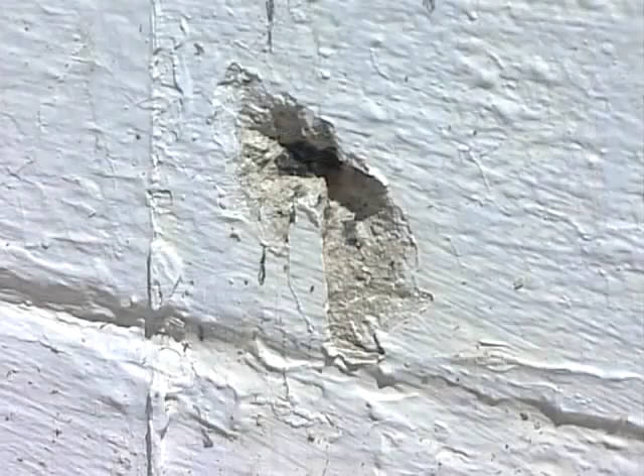It's time again to paint the outside of your home, but didn't you just paint it a few years ago? Yes, and you'll be painting it again in another few years, and another few years. Mother Nature takes a toll on the appearance of your home's exterior. Rain, snow, sun, and pollution are just a few of the elements that cause even the best quality paints to chip, flake, and peel.

Since more homeowners today are staying in their homes longer, they're finding they're painting their home's exterior an average of 10 separate times, at a cost of up to $8,000 to paint your home every 3 to 5 years. Add in inflation, and a homeowner could end up paying up to $80,000 to paint their home over a 30-year time frame. $80,000? That's outrageous.

Now there's a better way to maintain the beauty of your home's exterior. And it's not vinyl siding or fiber cement siding. It's not even a paint. It's a revolutionary coating system that's so advanced it protects your home for a lifetime.

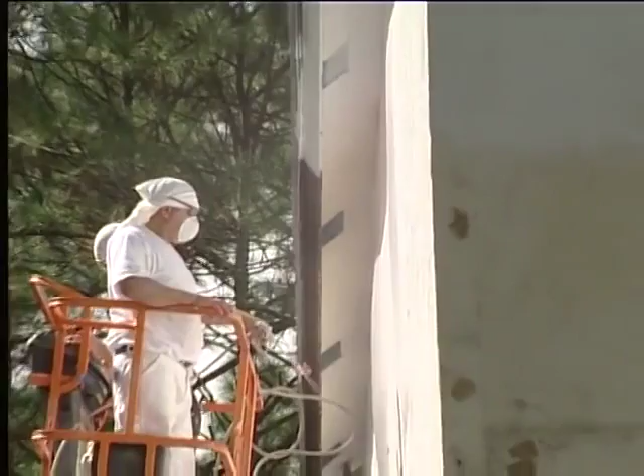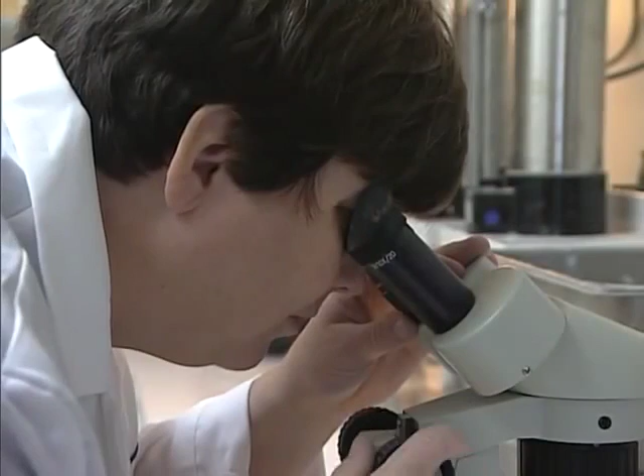It's Tex-Cote Supercoat. Tex-Cote was scientifically formulated and tested to give your home the ultimate in beauty and weather-resistant protection. Many times thicker than ordinary house paint, Tex-Cote can withstand an average of 40 years of exterior exposure, no matter how harsh the conditions. Even moisture can't penetrate it.

From stucco to wood to masonry homes, Tex-Cote Supercoat can be applied to a variety of surfaces and in a variety of textures. Whatever your home's exterior surface, our professional applicators will carefully and thoroughly apply Tex-Cote using our exclusive 10-step process. First, we'll inspect your home's exterior. This inspection will reveal any surface deterioration such as peeling, flaking, and suspect areas.

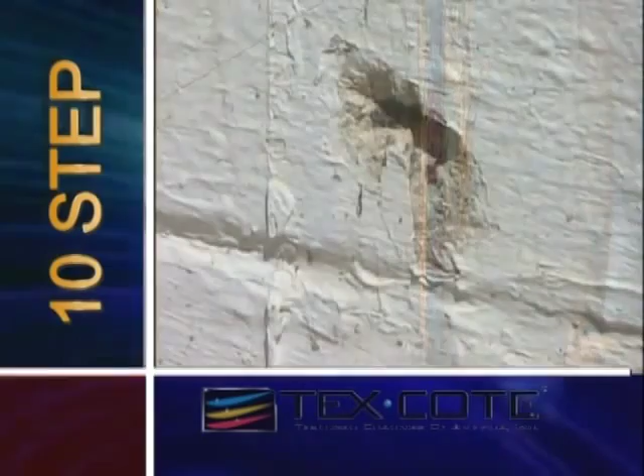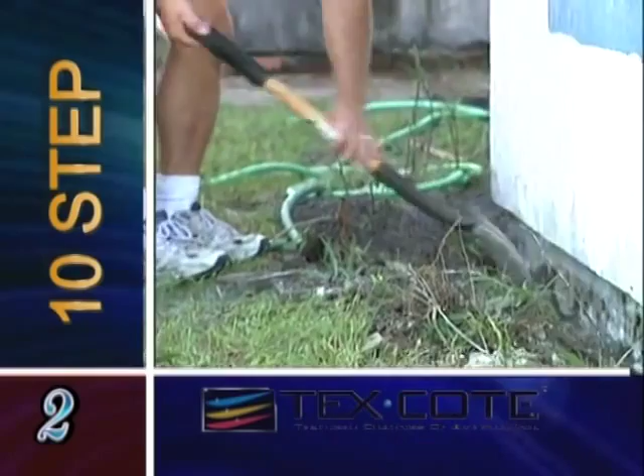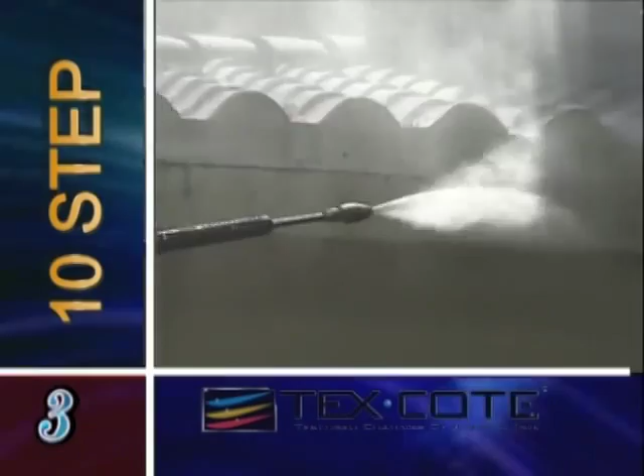Second, we'll trench around the perimeter of your home where possible. This provides full Tex-Cote protection below the grass line, helping to inhibit the capillary action of ground moisture while helping eliminate costly repairs to the foundation of your home. Third, your entire home is cleaned using powerful pressure cleaning action to remove dirt, stains, loose paint, and foreign substrates.

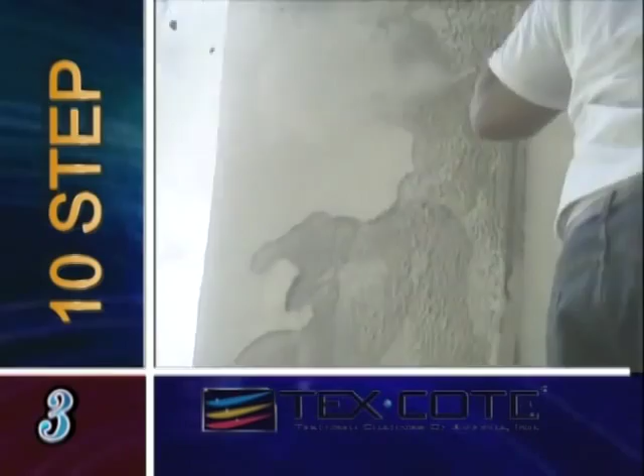It also removes surface mildew and algae. This cleaning not only reveals areas in need of patching, but also creates a clean, tight bonding surface for the Tex-Cote Primer and Tex-Cote Supercoat Top Coat.

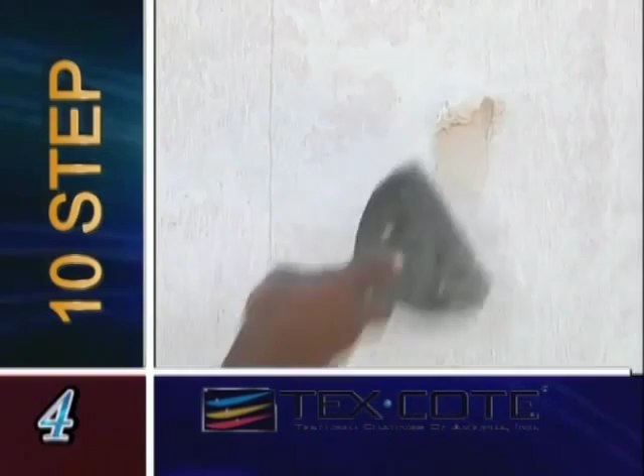Fourth, deteriorated areas are prepared and patched using specially formulated TexBond Flex Patch, or for more difficult areas, a skim patch is used. These products correct surface defects and create a sound and uniform surface for coating.

Fifth, for the most professional-looking job possible, careful masking is done to all areas that are not to be coated, like windows and doors. Bushes and shrubs near your home will also be covered to protect them from overspray.

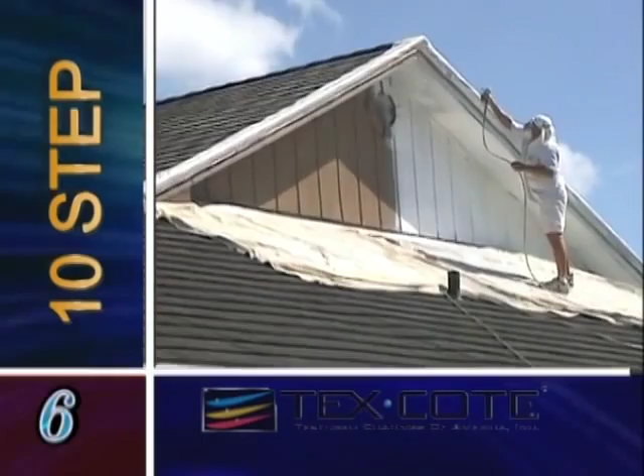Sixth, the Tex-Cote Primer is sprayed on using heavy-duty equipment at pressures up to 3,000 psi. This special spraying process creates a thick, armor-like surface that protects the original exterior wood or masonry surface from weather damage.

Seventh, your entire home is carefully inspected for quality and missed areas. Eighth, depending upon your preference, either Tex-Cote textured or smooth coating is evenly applied to the surface of your home.

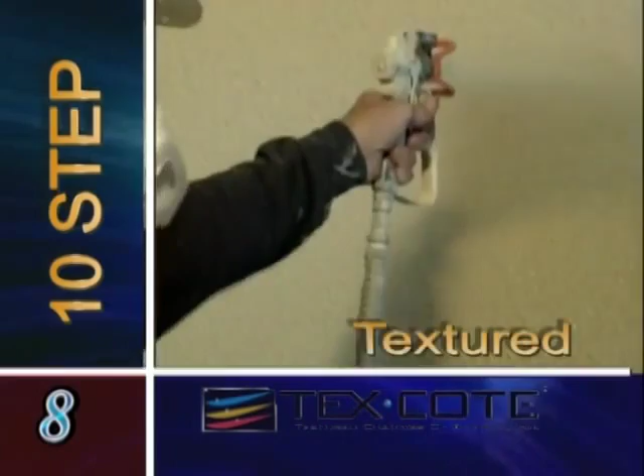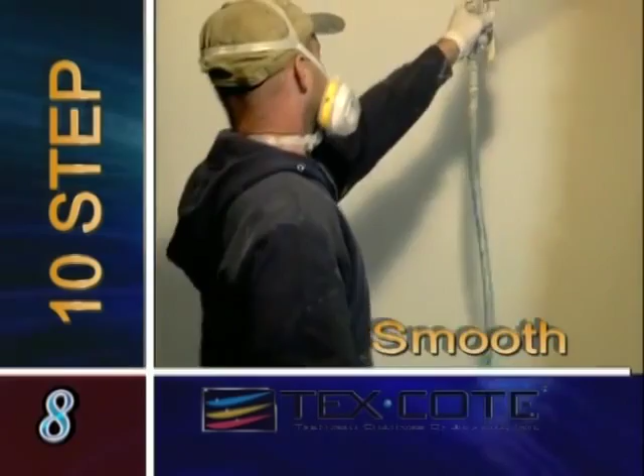This scientifically proven finish adds exquisite beauty to your home while providing a second barrier of protection against the elements. In addition, the finish has been specially formulated to reflect the sun's heat and can lower surface temperatures by up to 40 degrees when compared to traditional paints in many colors.

This revolutionary heat-reflective finish produces a longer service life and the best weathering and durability in the industry. It could also provide energy savings.

Ninth, the masking is removed from all areas, and then trim coat is applied. Trim coat provides the same level of high-performance protection as the rest of the coated home, and is available in both satin and semi-gloss finishes. Like the SuperCote finish, trim coat also contains reflective pigments to reduce fading.

Finally, lawns, shrubs, and other surfaces are cleaned of debris. Your property is left clean and beautiful, just like your home. Your newly coated home is protected against sun, rain, fading, chipping, frost, snow, wind-driven rain, and moisture.

We are so sure about Tex-Cote Supercoat systems that we back it up with one of the toughest warranties in the industry. Nothing else comes close.

For beauty, selection, durability, and cost savings, trust the name that's led the industry in coatings technology since 1961. The name that's been used by architects, builders, and contractors around the world for over 40 years, protecting thousands of homes just like yours. Trust the name that's been used by such companies as Home Depot, Target, CBS Television, Coca-Cola, and protects the famous Hollywood sign, the LA Coliseum, and some of the country's largest FAA towers.

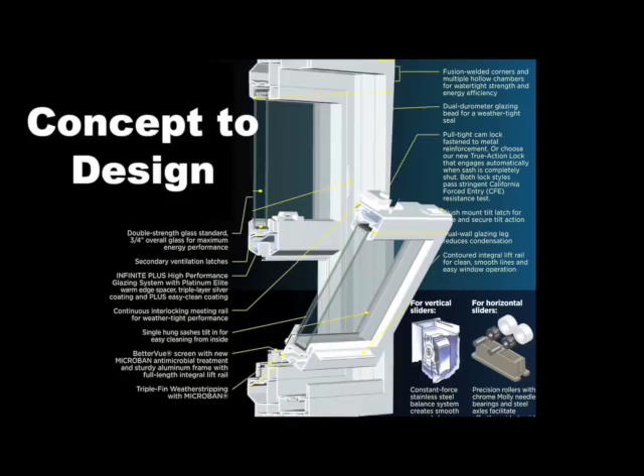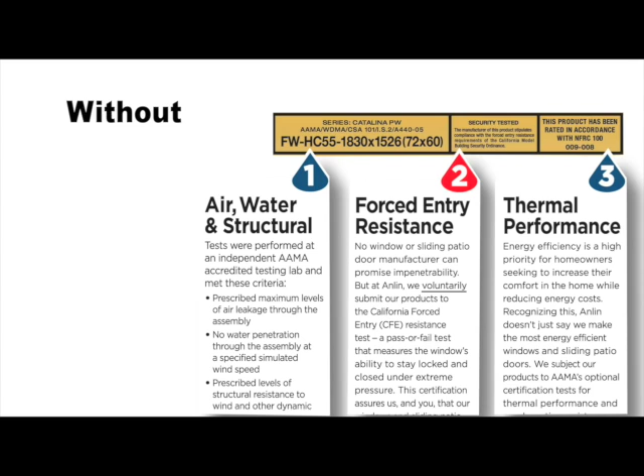Anlin Window Systems is more than a window. It's a window system, from concept to design to the manufacturing process. Founder Tom Vidmar had a vision to create a vinyl replacement window for the California market that was the most beautiful, the highest in energy efficiency, and the safest on the market, all without sacrificing quality for price.

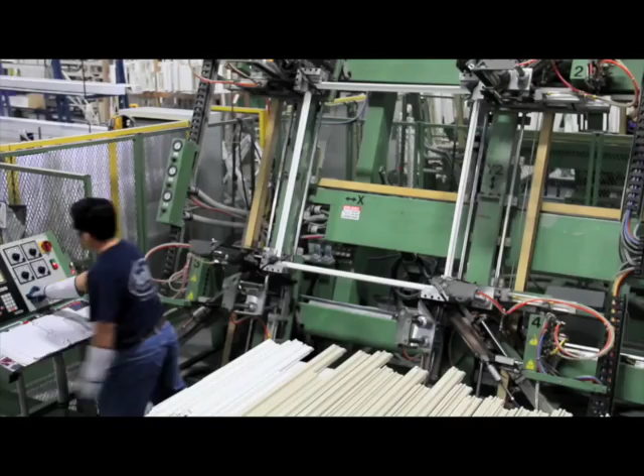Tom and his team achieved this goal by utilizing state-of-the-art robotic equipment to combine 1,542 components and a series of industry-exclusive processes.

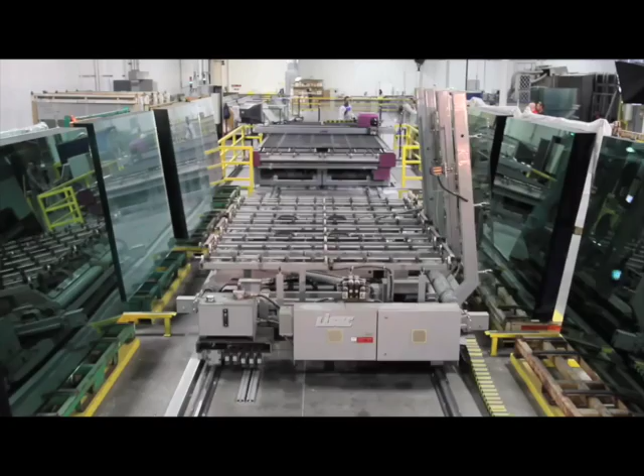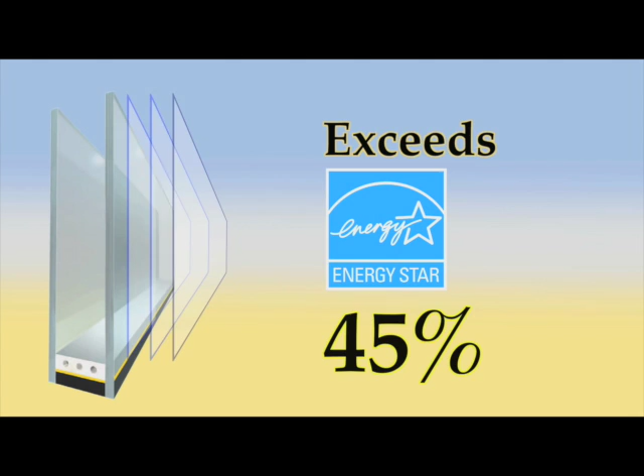To have the best windows, you have to start with the best glass. Anlin leads the industry with their exclusive Infinity Plus high-performance glazing system, providing you with maximum energy savings without compromising on beauty. The science behind the glass is three layers of real silver argentum coating. Anlin's glass exceeds Energy Star requirements by 45%, is 100% more effective than normal glass, all while blocking 95% of harmful UV rays.

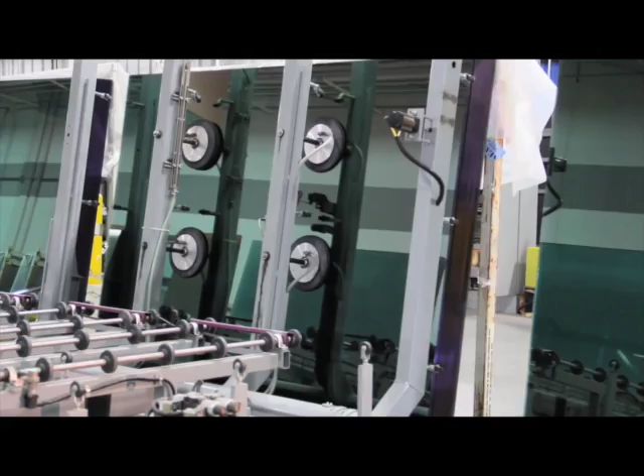While most companies have 12 or more pairs of hands touching their glass, Anlin Window Systems invested in a hands-free automated glass loading, cutting, and edge deletion system, because nobody wants fingerprints inside their glass.

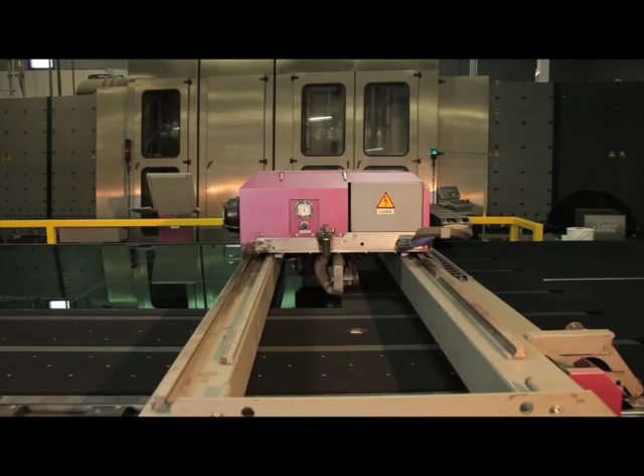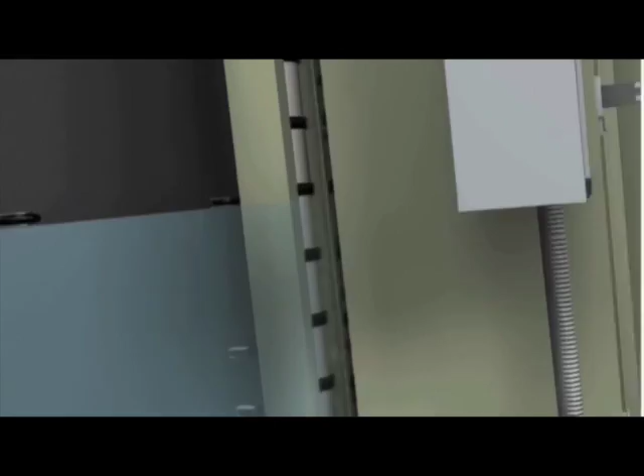The automation doesn't stop there. Each piece of glass runs through an 8-brush vertical glass washer using hospital-quality deionized water and a high-pressure air dryer to make sure the glass is clean before being sealed.

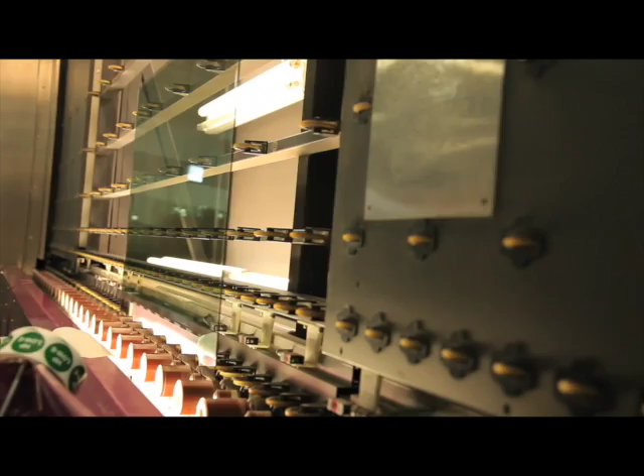The glass unit continues down the line where each piece of glass is light inspected by a pair of human eyes, looking for any scratches, defects, or imperfections, anything they can do to reject that glass before it makes it into their product and out the door.

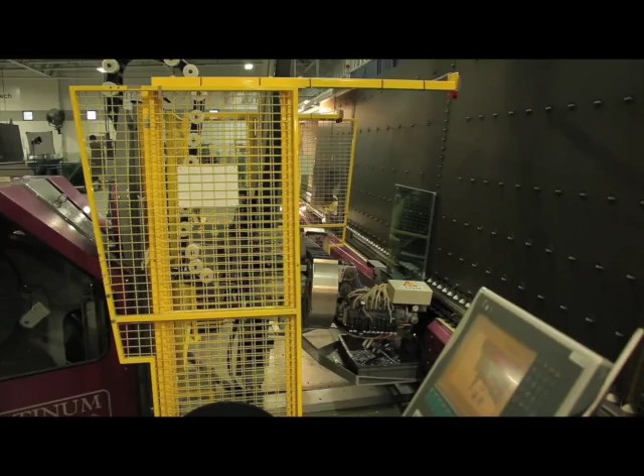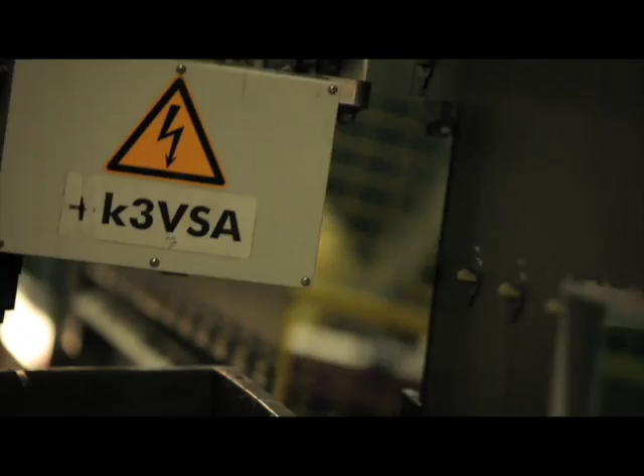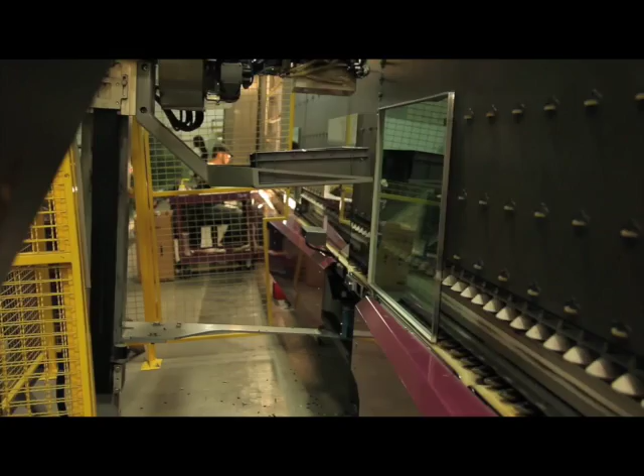Now the window becomes a dual pane, separated by Anlin's exclusive Platinum Elite Spacer. The Spacer Robot follows the edge of the glass, creating a multi-layer vapor barrier and secondary sealant which conducts virtually no heat, drastically reduces condensation and mold between the panes while standing up against heat, cold, and high winds, providing a lifetime of maintenance-free comfort.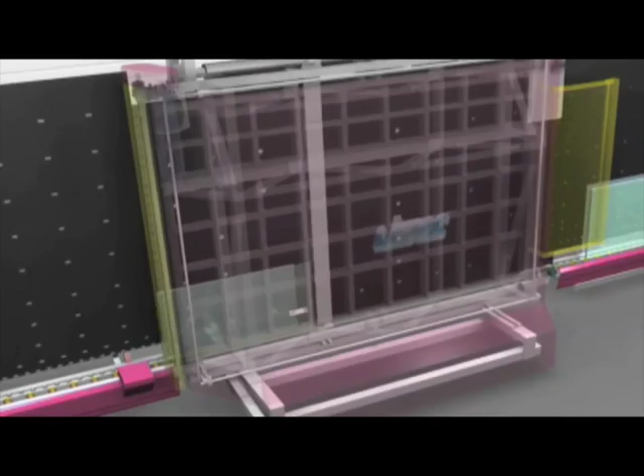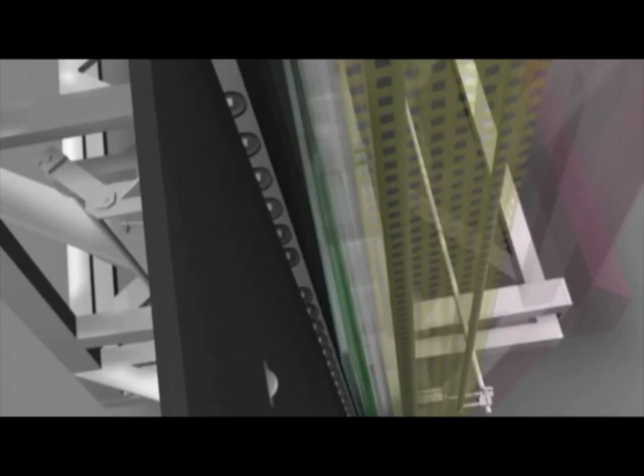Now it's time to fill the window with argon gas, which provides an extremely effective layer of insulation from heat, cold, and noise. Unlike other manufacturers who do this by hand, subjecting them to human error, Anlin uses hands-free, state-of-the-art machinery. Two airtight doors seal the chamber, and the entire atmosphere is flood-filled with argon gas while the two pieces of glass are pressed together, sealing the gas in.

That's how Anlin achieves a 90 to 95% guaranteed fill rate of argon gas. They are the only vinyl window manufacturer in the state of California that has this technology.

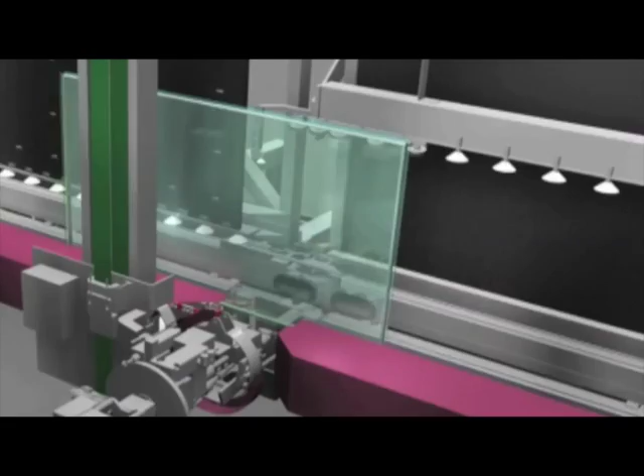The dual pane window is now ready to receive the primary seal of pure butyl rubber. This double seals the window and keeps moisture from entering in. Anytime Anlin can take a manufacturing process in-house to control quality, lead times, and get a better product to customers, they do it.

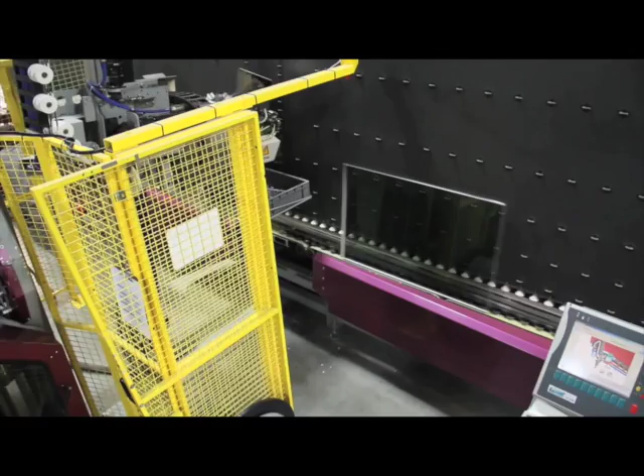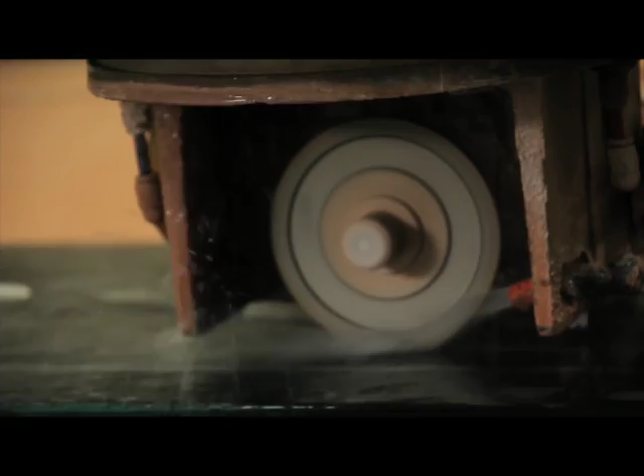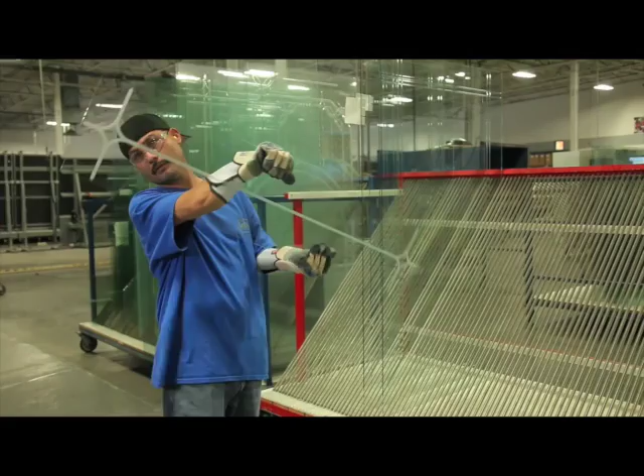The V-Groove machine is a great example. It uses diamond grinding wheels to cut and polish decorative patterns into the inside panel of the glass surface, creating your custom design. It won't collect lint or dust because the etching is between the panels. If you can dream it, they can make it happen.

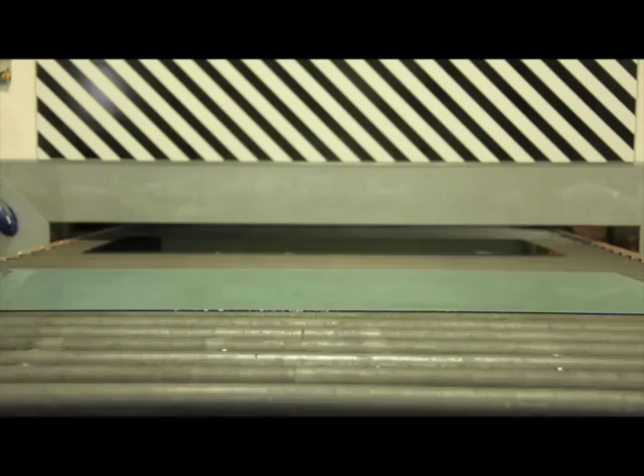If you're looking for tempered safety glass, Anlin is the only major California window manufacturer with in-house tempering to create their own safety glass. This drastically improves quality and lead times.

Now that the insulated glass unit is complete, it's ready for the vinyl frame. Anlin Window Systems only uses Micron Blend Vinyl, a unique lead-free proprietary formula for all their window and door frames. It's optimized for best weathering, durability, color retention, and impact resistance. There's simply no better vinyl for windows and doors than Micron.

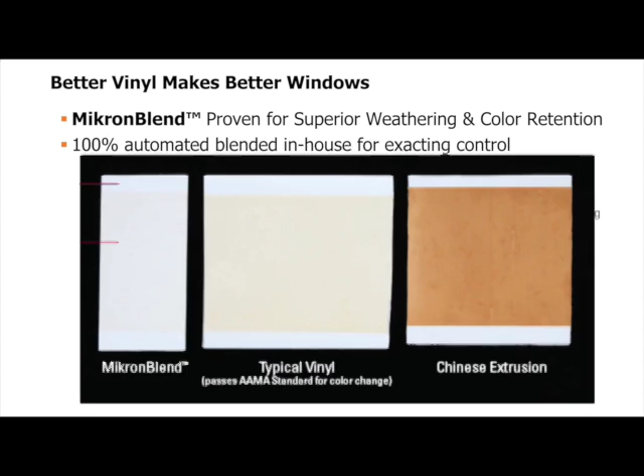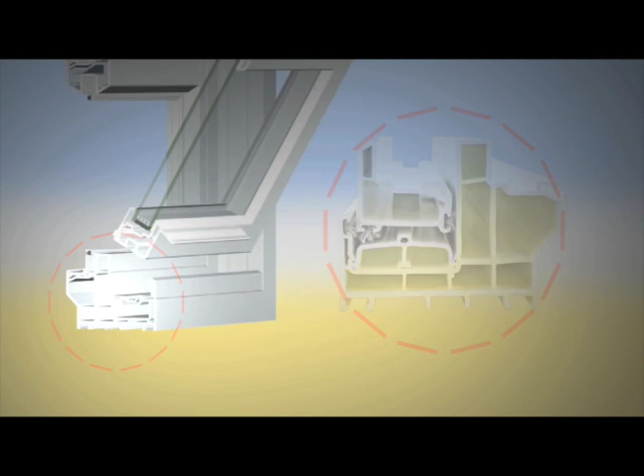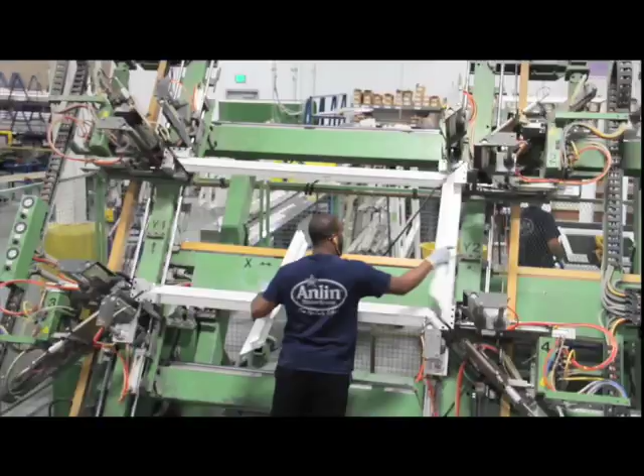Anlin's window frames have multiple hollow chambers for watertight strength and energy efficiency, and a continuous interlocking meeting rail for weather-tight performance. Each piece is miter cut to exact measurements, then sent to the fusion welder where all four pieces are placed into the machine at the same time for the most accurate and beautiful finish.

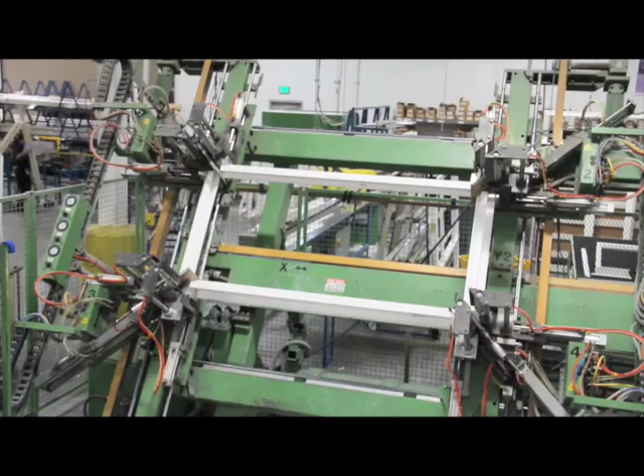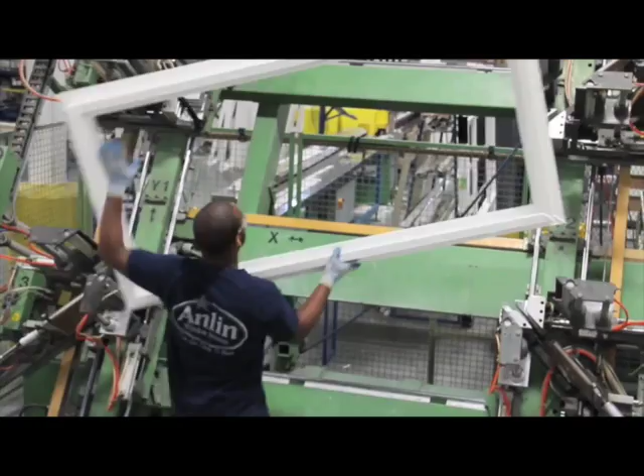All four corners are heated to 430 degrees, melting the vinyl, then compressing the corners together simultaneously, creating a bond that is stronger than the surrounding vinyl. By using a simultaneous 4-point weld, it creates a perfect square every time, ensuring the net width and net height. Nothing can slip out; everything is driven together.

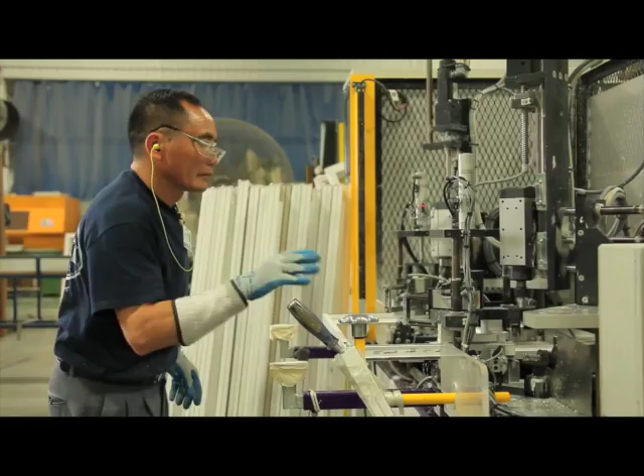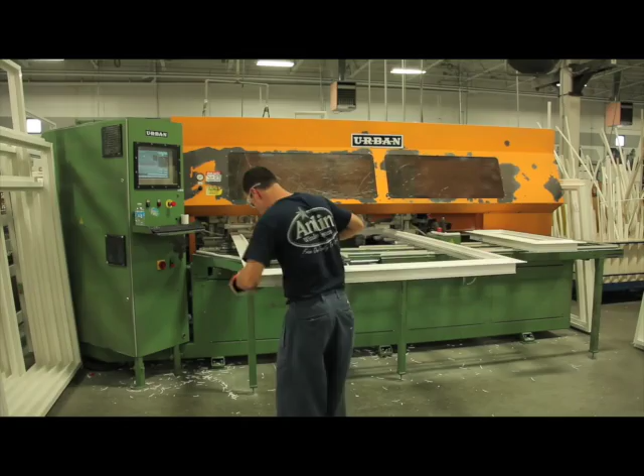Each frame is now put through the computer numeric controlled corner cleaners. While other manufacturers just pass the frame down the line, Anlin goes one step further by having an individual inspect every piece and hand trim each frame for a detailed finish, just to add that little bit of extra quality.

Every window manufacturer has weather stripping, and while that works, Anlin decided to triple it. Anlin is the only manufacturer that uses triple fin weather stripping.

The hardware is now applied into reinforcement, enabling Anlin to pass the most stringent forced entry tests, keeping you and your family safe. Now the glass and frame finally come together in a marriage guaranteed to last a lifetime.

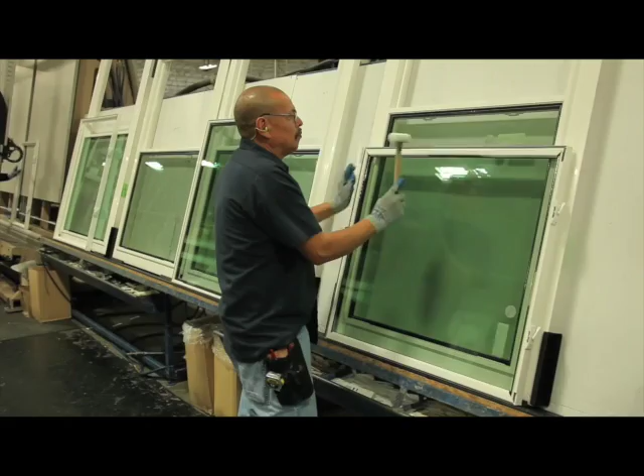The window is finished off with a dual durometer glazing bead for a weather-tight seal. After one more final inspection and cleaning, your windows and doors are ready to be shipped to your local dealer. Anlin Window Systems is more than a window - it's a window system.

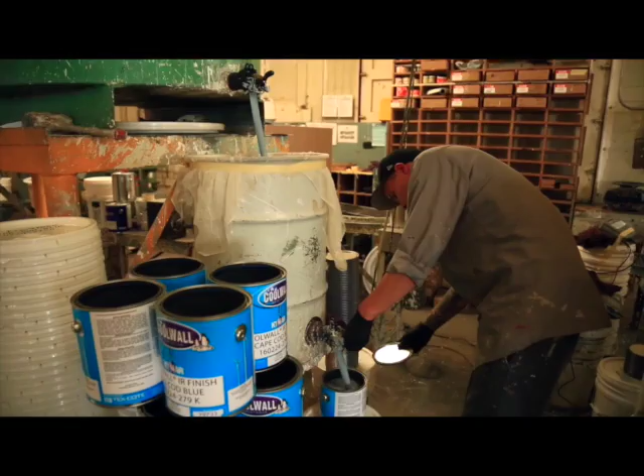My name is Jay Haynes, I'm president and CEO of Textured Coatings of America, Inc. I'm a third-generation family member running this architectural coatings company, and we've been making products for homeowners since 1961. Our philosophy is simple: we want to make it right every single time. We've got a team of chemists and a technology group, so we make everything from scratch, we don't repackage anything. In 2005, we developed our first Coolwall coating system.

The beauty about Coolwall is if you're going to paint your home anyway, why not use something that gives you immediate energy savings? The proof's in the pudding, and our pudding is delivering a reflective coating that lets the homeowner pick any color they want. We're weatherproofing that home better, sealing and hiding hairline cracks to a much larger degree than a typical paint system. We offer a lifetime warranty as long as they live in their home, and to this day, we haven't had a single complaint about a home fading.

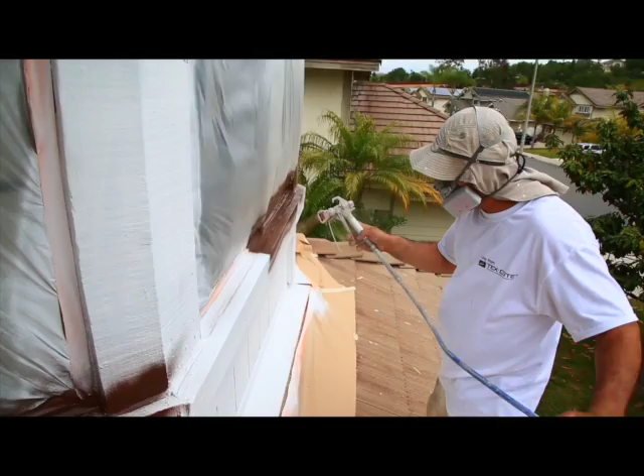Because of the HERO program, the word has gotten out and interest is so much more significant, bringing to light a technology people may have otherwise never heard of. I think HERO is a complete game changer.

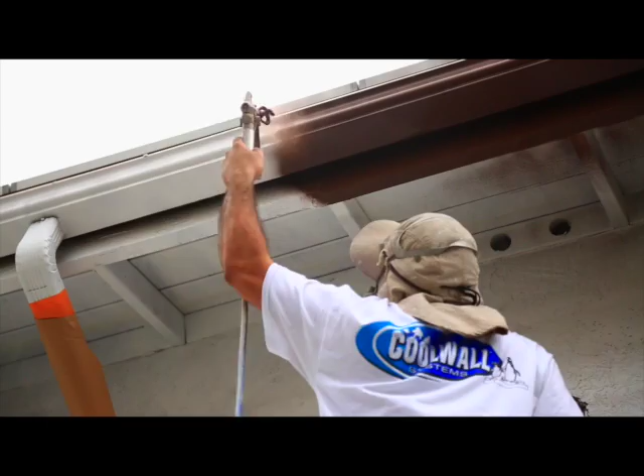We're really pleased with the job, and the house looks better, it's a great paint job. My walls on the inside of the house used to be piping hot, so the house should be a lot cooler in the summertime. I'm really pleased with everything, the beauty, the look, the performance, couldn't have been happier. We're at the top of the ladder when it comes to sustainability, providing a coating solution that's completely unique to that homeowner, saving energy and not fading. There's no one else doing that right now in America.